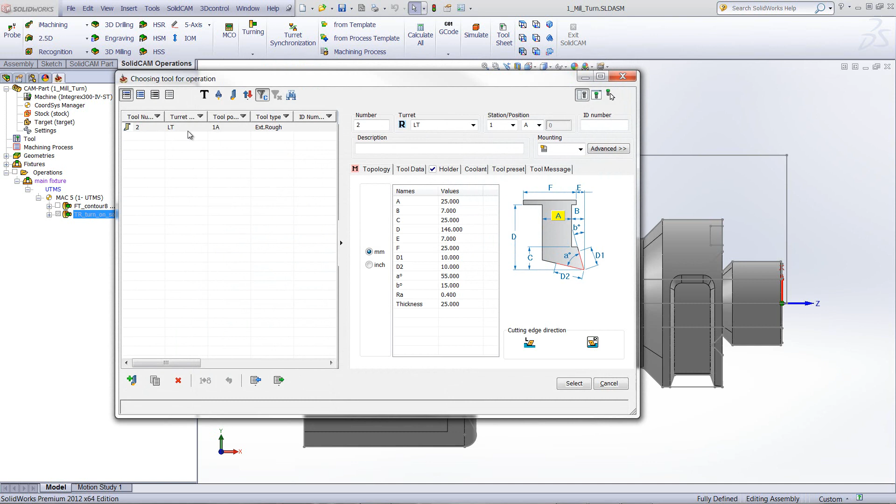And now I'll choose my tool. When I go to tool, I'll choose again the first tool I had before, put it in the right position that I need, and now we have our slave tool. If I go into slave tool and click on select, you'll see that I only have one tool over here. This is the tool that I have in my bottom turret. I'll choose that tool, click on select, and you see it automatically comes with the right position. I don't have to click any position over there. It's done for me automatically.

I have my levels, and then I have my technology. And if we take a look at my technology, I have the exact same options that I had in my regular roughing operations, with one main thing that's different. Now we have what we call balanced mode. We have two types of balanced mode, simultaneous and trailing. Let's start off with simultaneous. What exactly is simultaneous? Simultaneous allows you to work with both tools at the exact same time. They're both exactly parallel one to the other.

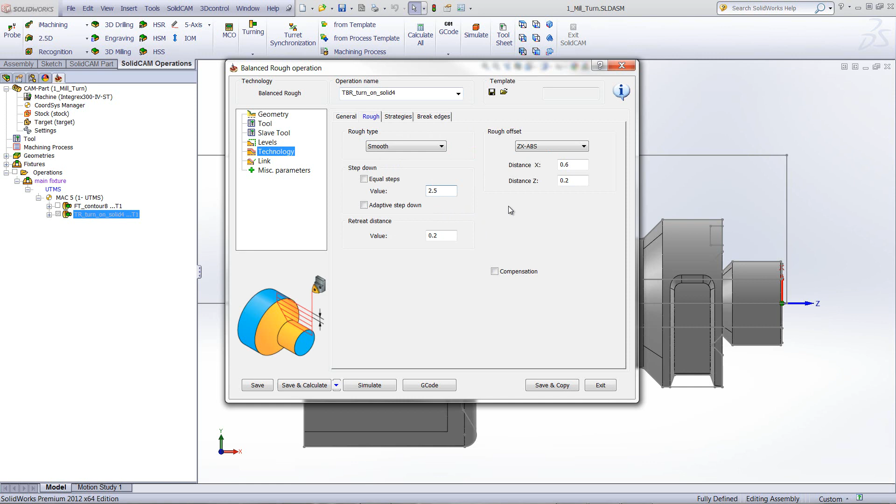Now, the advantages of working with this, and we'll see this as we do our simulation, is that you always have support for thin parts on the other side, and you could also work a lot faster with this type of an operation. Let's go into our rough. We'll use our smooth. We'll have our step down value at 2.5 millimeters. Let's have our distance X at 0.6 and my distance Z at 0.2. We'll put our strategies at non-descending motion. And then we'll do save and calculate.

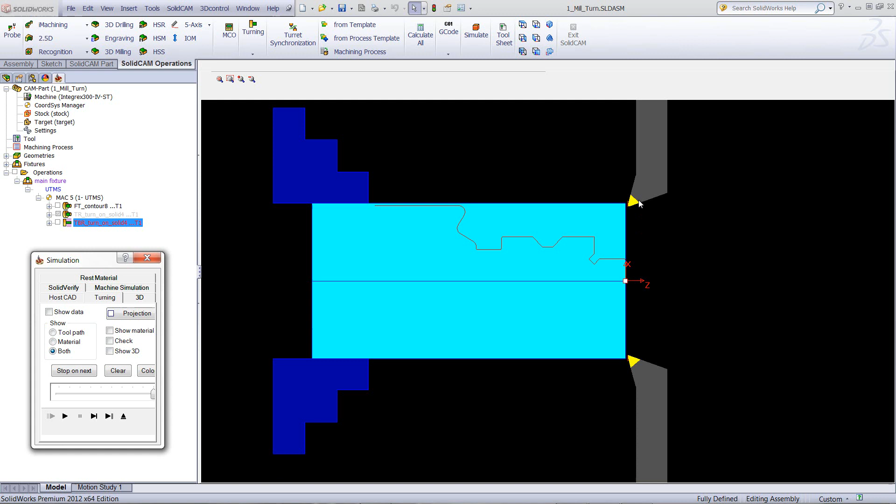And let's take a look now at our simulation. Again, we'll use the turning simulation. When I start, you can see we now have both of these tools, and both of these tools are at the exact same position. When they do that, you can work a lot faster with the tool. And as I said before, not only working a lot faster, but if this part was thin, this tool always supports that tool over there and vice versa. So there's always support, allowing for an exact turn on thin parts without worrying about the part bending or warping in any way.

We'll let this simulation finish until the very end, and as you can see, it's cutting down on the part all the way to the bottom, exactly where we want it, always staying simultaneous one to the other. That support is always there, and you'll see as you machine this part that it'll be machined a lot quicker because you were able to use two tools at the same time. As we get down towards our final steps, we'll cut that area over there. And now we'll be finished with our rough balance operation.

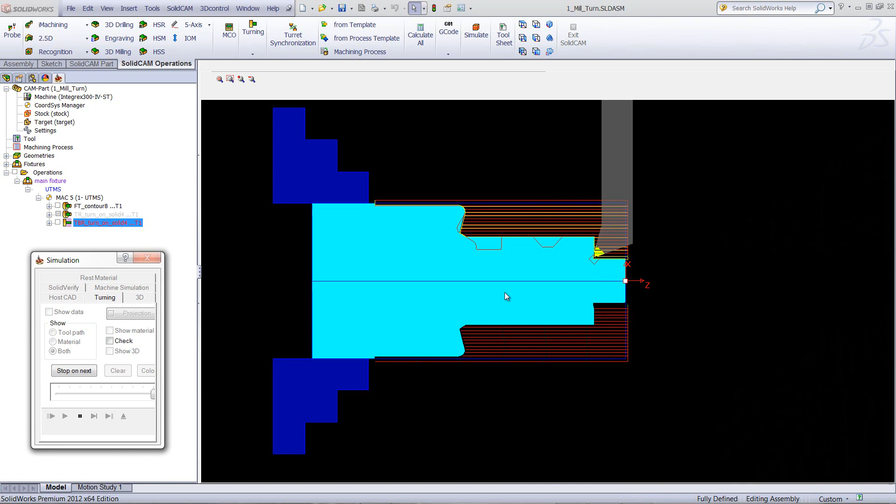Now, let's go back and make a change in our General tab. This time we'll choose the other option called trailing. What exactly is trailing? Trailing allows for one tool to work behind the other tool, and at the same time, it works on a different diameter. So while one tool is turning one diameter, the slave tool, the second tool, is already turning on a deeper diameter because there's no material left there. So let's, for example, make the distance between them 5 millimeters. In other words, they're trailing each other by 5 millimeters. The slave tool, as it's trailing, when it finishes, only then will they both start working again.

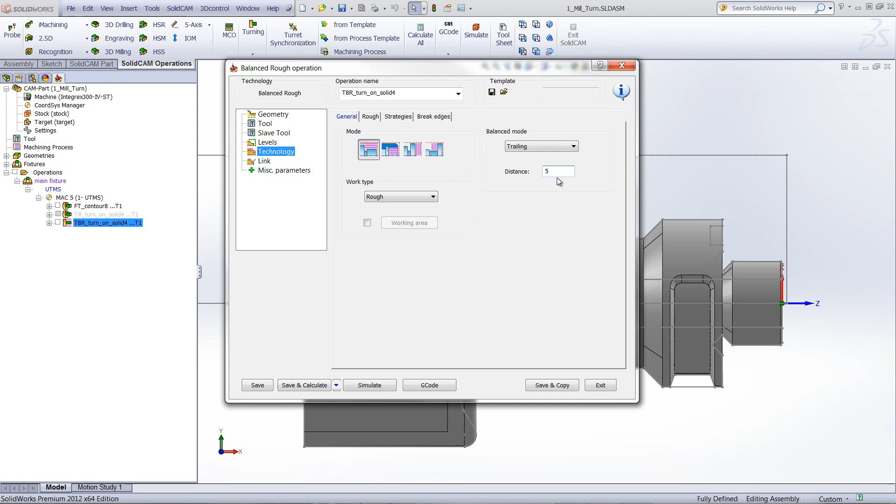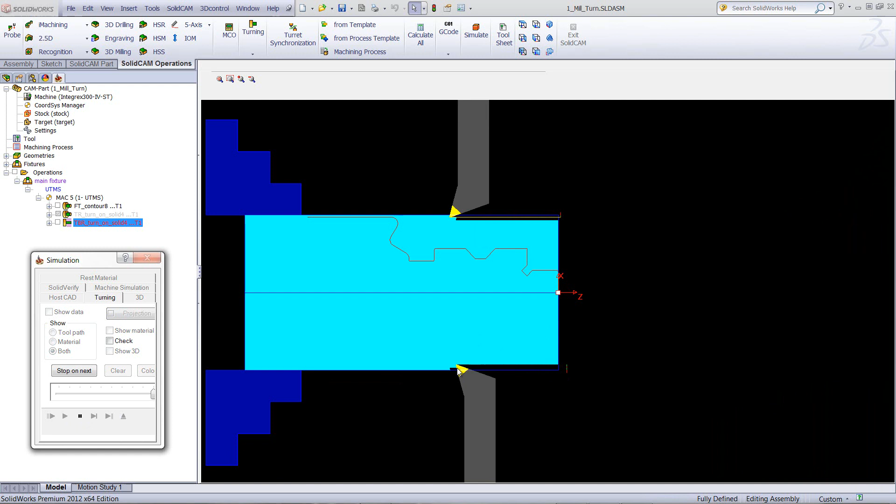Let's take a look at the simulation, and we can see this clearly. Again, we'll start, and note now that the tools are not in the exact same position. This one is back 5 millimeters from this point over here. I'll start my simulation. You see the tool is working across, and you can see over here already that this is deeper, working on the next diameter. Now this tool did not start until this one got back over here. They'll always wait until they both get back. This is now waiting, and it's starting on the next diameter over here.

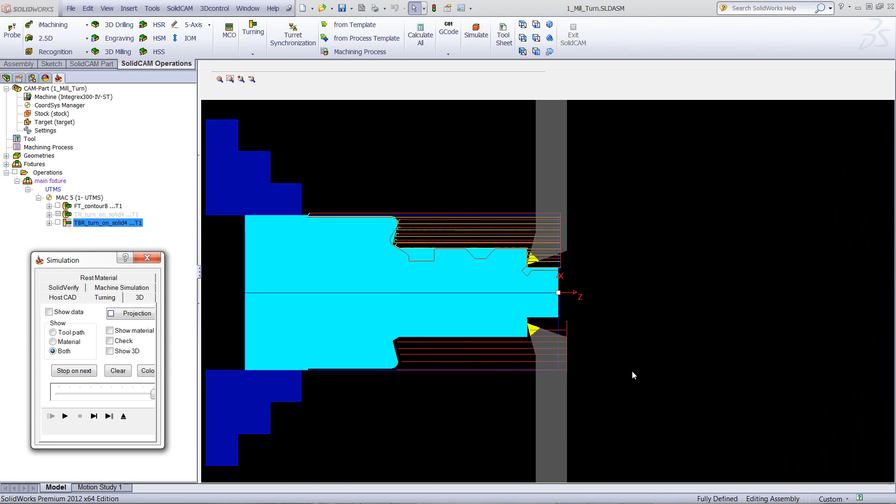And you can always see at these steps that it's always working on the next diameter. This one on the outside one, and this one on the next one over here. And this goes all the way down, and it will always wait until this finishes its step to start working. Now this one is waiting until this gets back, and now we've finished the turning using the balanced roughing of trailing.